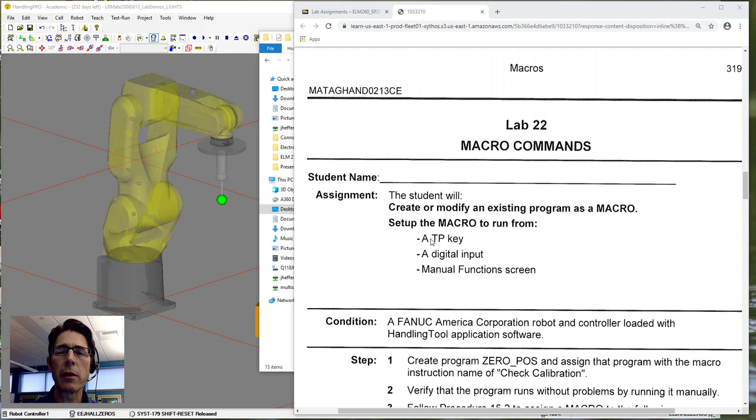So today we're going to be looking at a demo of Lab22, macro commands, how to set up macros. And so what we're going to do is in Lab22 you have to set up 3 macros. One is assigned to one of the teach pendant keys. The other one is assigned to one of the digital inputs, and one is assigned to manual functions.

So for the teach pendant key and the one assigned to the digital input, we're going to use 2 of the existing shape programs, the circle and the triangle. For the manual functions program, we're going to create a program called zero position. It's a very simple program, just has 1 point in it, and it sends the robot to all zeros of all the joints.

So that would be a good way if you were going to check the calibration of the robot joints and make sure it has an accurate reference point. You would send it to that position, and then you could just take a look at the witness marks and make sure that the robot is actually accurately in that position.

Okay, so first thing we're going to do is go and create this zero position program. So I'm going to go to select, create. Actually, before I do that, I'm just going to create a position register for the all zeros. So click on data, brings up registers. If I want to get position registers, I go to type, position register, and I'll take the next available one, which is position register 4, and I'll give it a name, bring up the keyboard, all zeros.

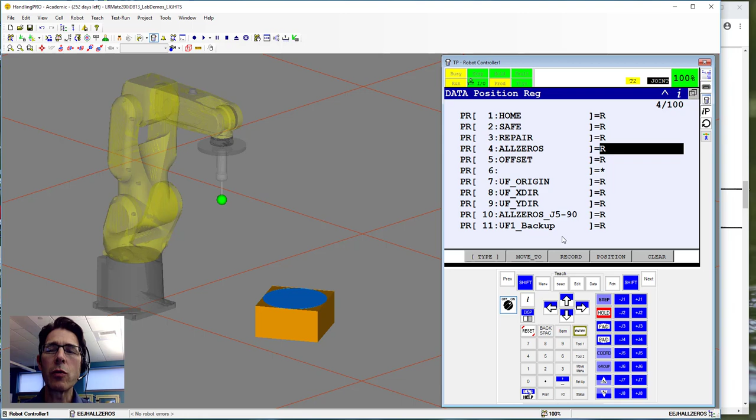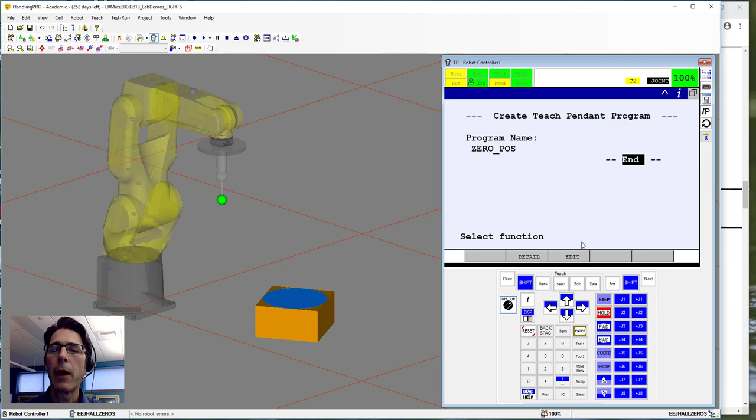So I'm going to go to select, create. Okay, so we want to create a program called zero position. Click on keyboard, ZERO_POS, and then we go to edit. And again, we're just going to put a point in. It doesn't matter which one it is, because we're going to change this anyway.

We click on where it says 0.1, and we go to choice, position register, and I think it was position register 4. Yep, that's all zeros. Okay, now we can run the program. Just check it. Shift forward, and notice the robot goes to the all zeros position. Then I can just jog it out of that position so we can see it go back there.

Okay, so we've now just completed that first part of the lab and verified it. So now we're going to go through the steps to create 3 macros, and I'm going to do them in order just like they're listed here. So the first one, we're going to take the circle program and assign that as a macro and assign it to one of the teach pendant keys.

So if I go over here, the macro control teach pendant keys are down here. There are 7 keys: tool 1, tool 2, move menu, setup, status, IO, position, and, is this one of them? 1, 2, 3, 4, 5, 6, 7. No, it's right here. So anyway, those are all the user keys available for macros. So that would be user key 1, user key 2, and so on, up to user key 7.

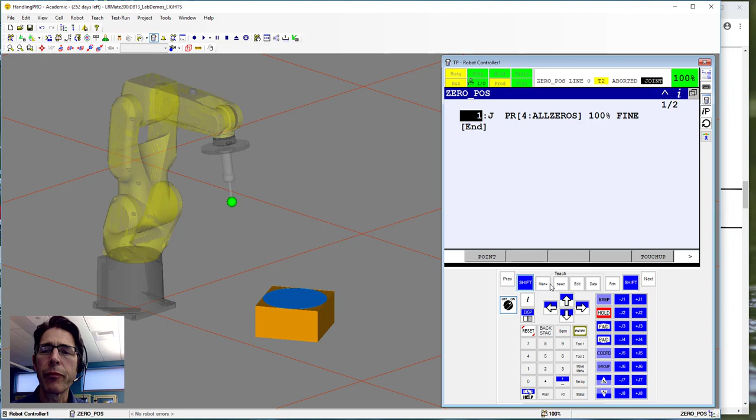So to get a macro set up, I go to Menu, Setup, Macro, and the first one, I don't really have to name it, but under here you can select which program you want. If you go to Choice, these are all my programs, so I'm just going to get my circle program, which is right here. And this is where you determine what kind of key you want to assign it to.

Now remember, with macros, any motion program has to be assigned to a shifted user key. You don't want to assign it to a user key. In fact, it won't even let you if you try to just do an unshifted user key. Oh, look at that. It did let me do it, but I'll probably get an error.

Yeah, there it goes. When I tried to put the number in, it gave me an error: can't assign motion. The reason for that is if you're holding the teach pendant and you happen to press that button without thinking, you don't want the robot to start moving around. So that's more of a safety feature. So make sure it's a shifted user key, and we're just going to use user key number 1.

And that's done. It automatically gives the name EEJH circle, which I could change if I want, but I'll leave it like that. So let me just demonstrate it, because now that it's set up, if I just do Shift and user key 1, which is tool 1, it goes and does my circle program. Okay, so I've now created a macro for that, so I can just press a key rather than selecting the program and doing run.

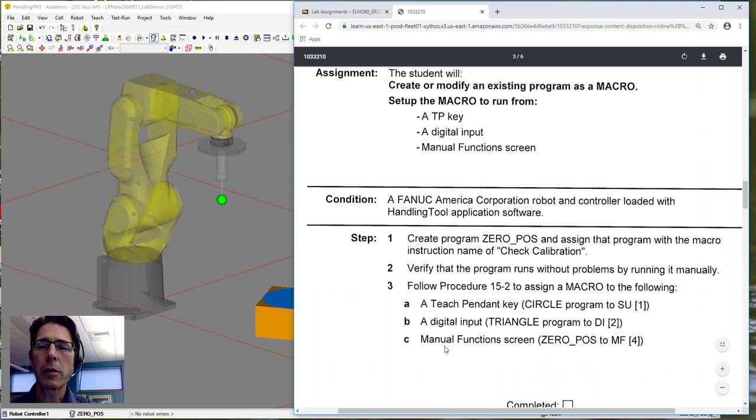And then the last one we're going to do is we're going to assign the 0 position program that we just created to a manual functions menu. So that's another place where you can activate macros. So you can do macros from a digital input, from a user key, or from the manual functions menu. All right, so back to the menu, set up macro, and this one, I'm going to just get our 0 position program, and I'm going to change this to say check calibration, because that's the real function or the purpose of that macro, check calibration.

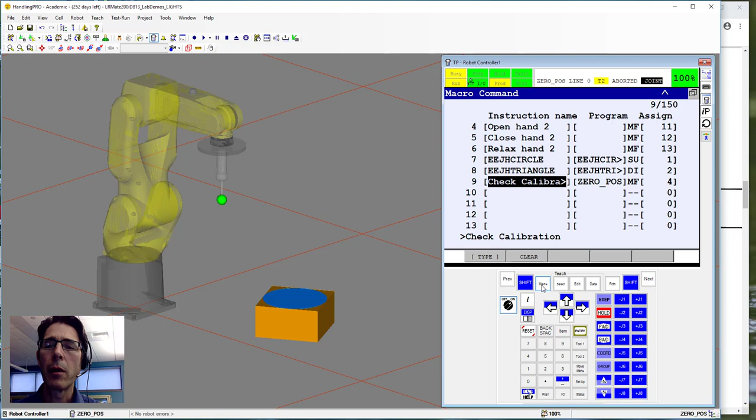Okay, and to assign it to manual functions, we go here to choice, and where it says MF, just MF, and it said to assign it to manual functions menu item 4. Okay, so now to activate that macro, the teach pendant has to be on in this case. And I just go to menu, and it's the third item down on the menu, manual functions, and you'll see that now we've got this thing called check calibration. There were a bunch of predefined manual functions in here, but this is the one that we're going to do. So to execute it, you just do Shift Execute.

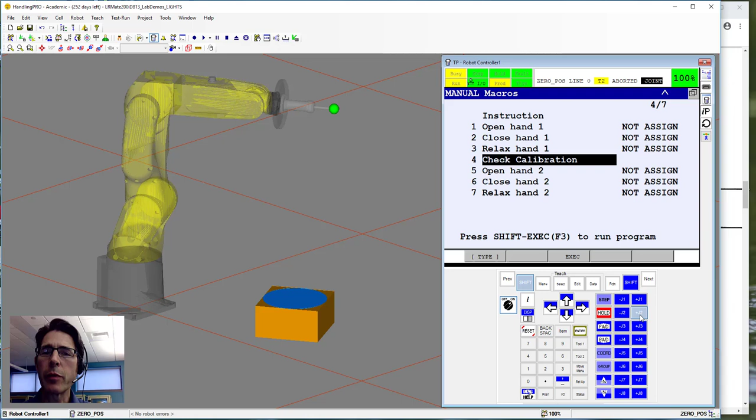And you notice the robot went into that 0 position. Let me do it again so you can really see, I'll just move it out of position. Okay, so Shift Execute quickly moves the robot so that all the joints are 0. That was our check calibration. Okay, so those are the 3 macros. Shifted User Key 1 is the one that draws the circle.

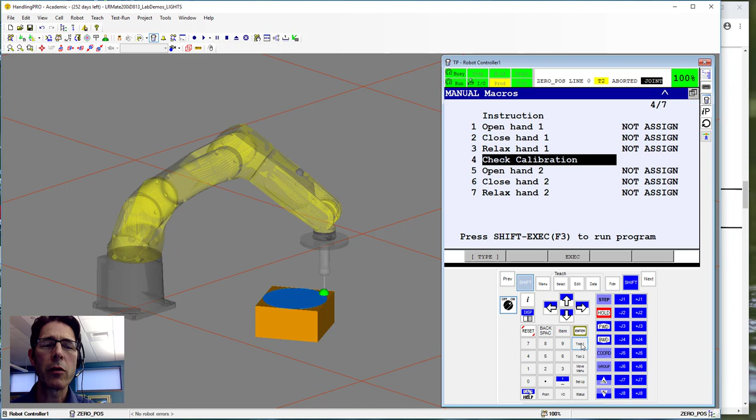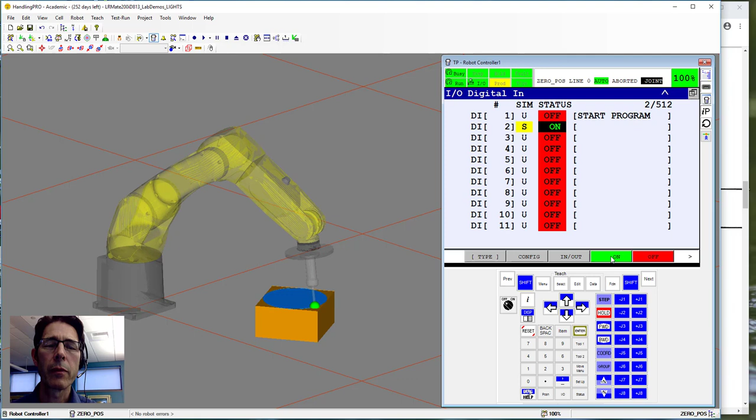And then if we turn the teach pendant off, go to Menu, I/O, Digital, and turn on the digital input. I have to turn it off first, and then on again. That's my triangle macro. Okay, so there's some examples of macros. I'm just going to unsimulate this before I stop.